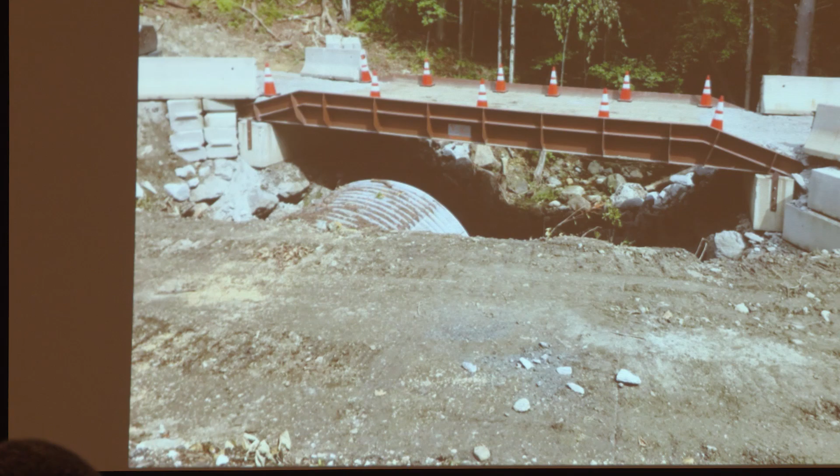Or you get lucky and you're replacing a culvert with a bridge and you don't really have to worry about the stream so much, and then you can throw in a temporary road. And I just want to put that in there to plug these temporary bridges. This is a Yard King. We actually borrowed this for a project. Really great, couple waste blocks. Really simple. Just wanted to throw that in because I know it comes up that you can't always close the road, and so that's a pretty good solution.

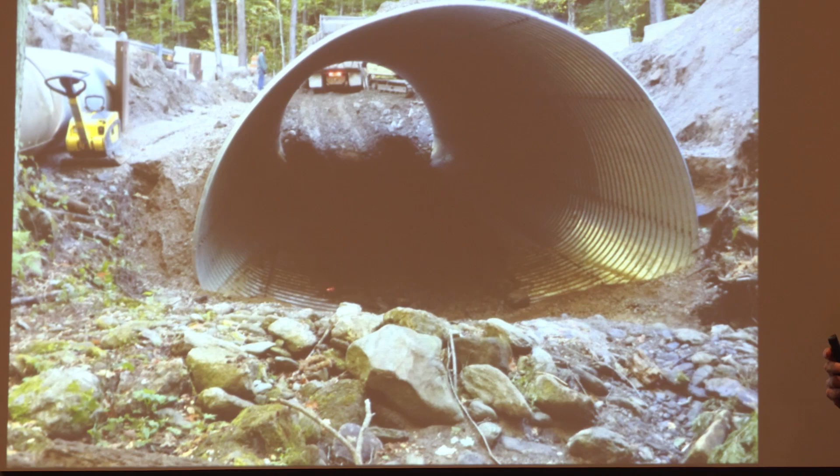So culverts, a lot of these structures are embedded, so they have a bottom. This is a multi-plate. I believe the width here is a little over 18 feet. Pretty big structure. So it's embedded. You can see on this one, there's the temporary stream bypass on the left. And so how do you get material in there? A lot of people talk about leaving some panels off the top and dropping them in with an excavator. I've never tried that. I know some have and it's worked. But you still got to manipulate that material in the structure.

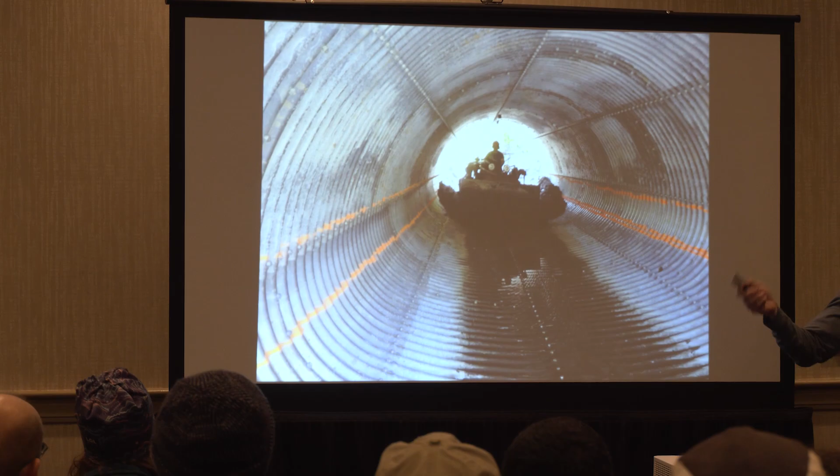And so what I like to do is paint lines. You have your stream bed elevation through your structure at your inlet and outlet. Run a string and then paint it. You see 2 lines. We're using stream simulation, so our structures are wider than the Vermont standard. And so we're accommodating that width with a bankfull bench, which is the second line.

This one was early. This is 2013. It's about a 13-foot wide structure. Contractor has got a mini excavator, and it worked really, really well. We could call in for bigger pieces, and he would bring them in. What we realized after the fact, and maybe it's obvious, but we didn't think about it, is everything settles, so you have to overfill a little bit. So if you want to match a certain elevation, you got to think about that. And so we've adjusted that. With our painted lines, we just adjust there, and so nobody has to really think about it.

And then you got to provide for ventilation. Maybe obvious, but it's not. I've been in culverts trying to manipulate stuff with rock bars, and you can't breathe. This is a very Vermont fix. It's a fan from a dairy barn. It worked really well. I think we had coats on in the culvert. It was really cold, but it was great. Worked really, really well.

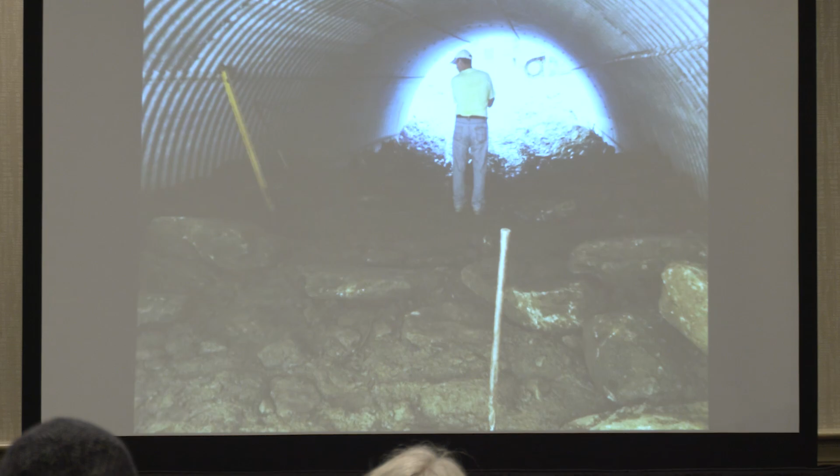And then there's a lot of physical labor in there. So when you're doing these projects, plan for that. I think the first one we did, I don't think the contractor realized that was what it was going to take. And so that taught us, at the pre-bid, really talk about what's expected. And so you'll see there's shovels and there's rock bars and there's physical labor. You're manipulating this.

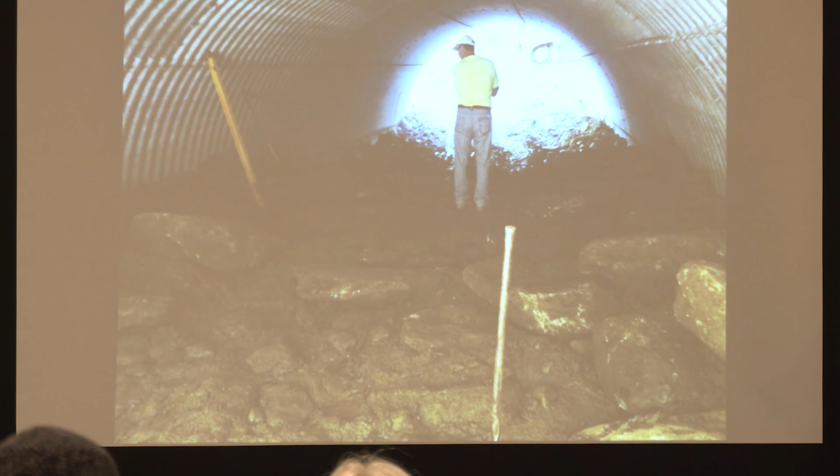And then sometimes you get to do a bottomless structure and you get the benefit of an excavator. I can't stress how important a thumb is when you're grabbing rocks. I know I've worked with a lot of contractors that didn't have thumbs on machines, and it's hard. So let's see if this works. I'll look at that technology.

So once you do that, then you got to tie it in, and that's where we had 200 feet of channel work upstream, and that was challenging. But it worked out. And then when you get the water through, a lot of people pull back and say, okay, water's there, we're done. But no, you got to make sure that it doesn't go subsurface. You got to wash those fines in.

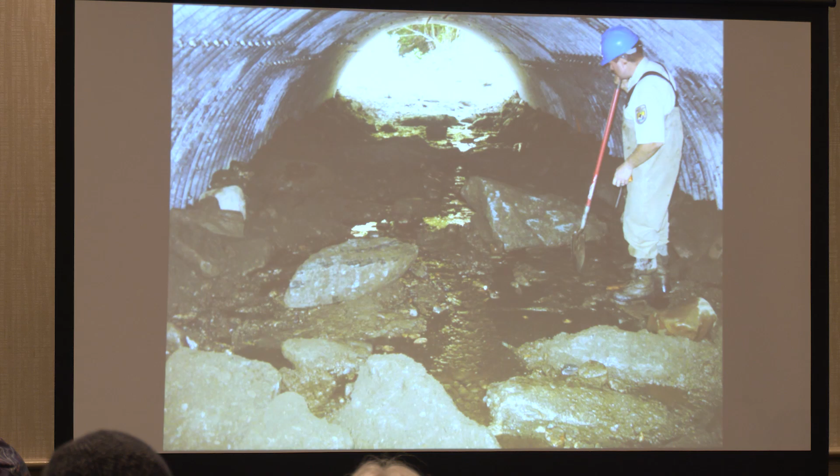This is the first structure we did in 2012. We learned a lot. And so we're chasing water with shovels. I know folks have used power washers and washed the fines in. There's a million different ways to do it, but you got to make sure it doesn't go subsurface. So when you're adding material into the structure, you got to make sure that there's a lot of fines in that mix. And we could dive really deep into material, but probably won't.

And then when it's all said and done, it looks like a stream. This is right after it was completed, that one that had over 200 feet of channel, and it fit seamlessly in with upstream and downstream. This structure went in 2017. Just in 2023, it went through five Q100 events in that subwatershed, and it doesn't look any different. And this was a perennial problem for the town. The site always had road issues, and they haven't had a single issue since it's gone in. So again, what's good for fish is really good for people.

So Ben, you want to talk a little bit about dams? Yeah. I'm Ben Canonica with Canonica Landworks, based out of Chelsea, Vermont. And Greg and I have done quite a few projects together, some dam removals, some riverbank restoration projects.

And I've also done a couple of culvert retrofit projects, which I haven't heard anyone talk about today, but essentially taking an existing culvert and making it so that the pool at the bottom is passable, and maybe putting baffles in as well. We've done a couple of those. I don't really see too many of those projects anymore. I don't know if they're still happening or not. Maybe they're just replacing them. It's a tool in the toolbox.

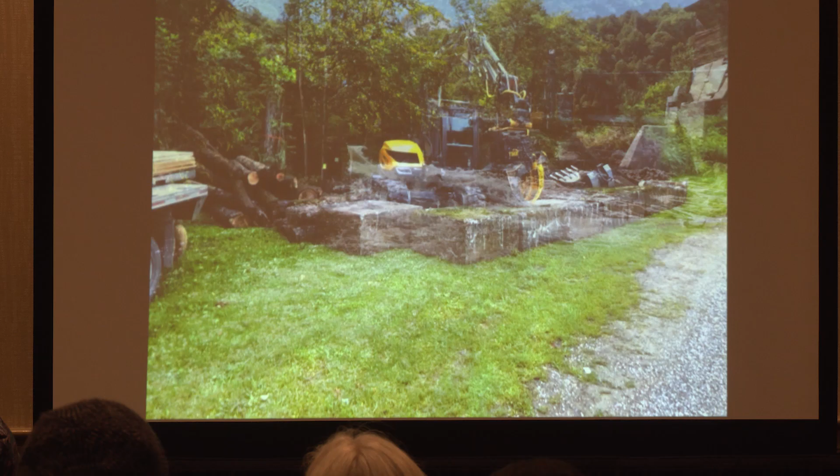And along with access is always, from my standpoint, just trying to keep things somewhat orderly and tidy. A lot of the sites, like has been touched on, are very compact. You don't have a lot of space to lay things out or stockpile. You can't see here, but this was part of a mobile home park, and we had a very small area to stockpile a bunch of material. And so these were old concrete blocks that were actually in the river, part of the abutment. And so we just pulled them out and made a containment area and then filled it up.

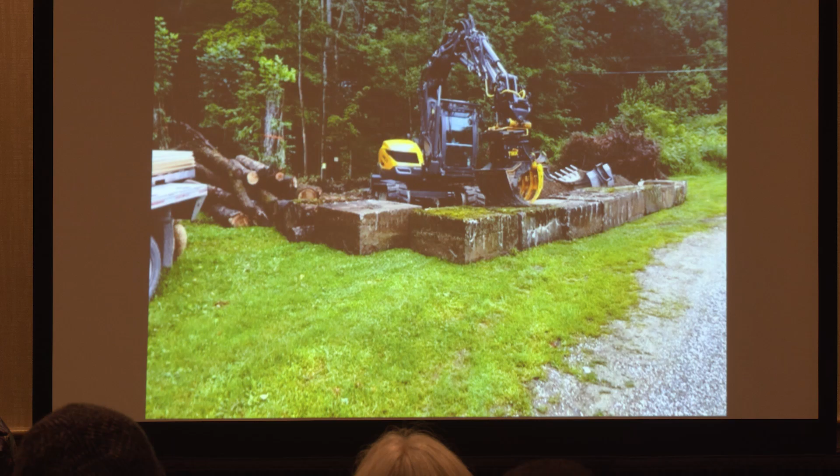And to be able to work in confined areas like that, it's pretty handy to have specialized equipment that you can work in areas that don't allow you a lot of room. But just keeping things orderly as well helps me. I work alone, so I try to make as many of the steps count as possible. And so for me, just having a sense of order helps me keep things going forward.

And I think it also helps with a public appearance, because if people come by and see, things are always going to look like a bomb went off at some point in the project. But if it's not like that for the whole time, I think you will get maybe a little bit less criticism and people stopping by asking questions.

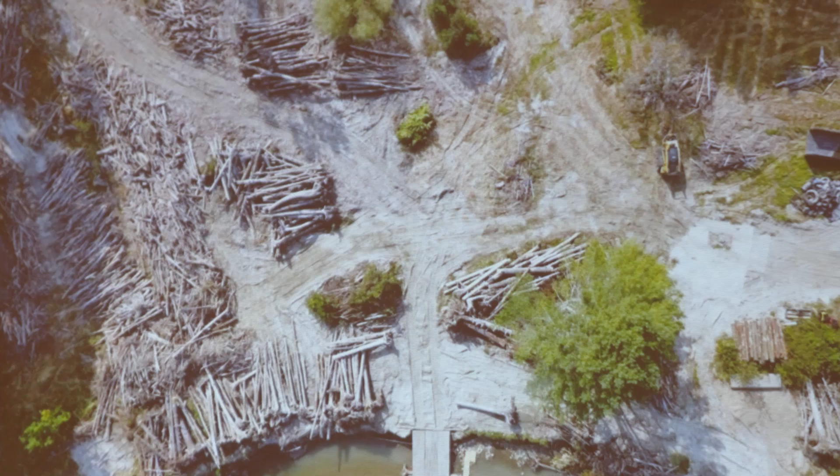This is a site we worked on this summer, and this just kind of gets back to getting things in somewhat of an organized fashion. We didn't have any before pictures, but basically this is a flood chute in here that was full of all that wood for like the last 20 or 30 years. So the project was to go through, sort all that wood, and then rebuild in this lower corner what we call a log revetment.

So being able to go through that and sort it all out, and then, we actually had a big grinder come in and grind up all the residual material, but just having to work through kind of an unimaginable log jam essentially, and think about keeping things somewhat orderly so that you can have things in certain areas, because once we got it all sorted out, all the root wads and stuff had to come over to this corner to be built. So just a certain process to think through.

And like Greg and I were talking about, you're always going to have a plan when you start, but on a lot of these projects, there's numerous unknowns that you'll encounter. And so being able to change your plan on the go is pretty essential. And for me, it's one of the challenges I like about it, because there's a lot going on you have to think about. But this got away from our dam removals a little bit, but just showing you overall site organization.

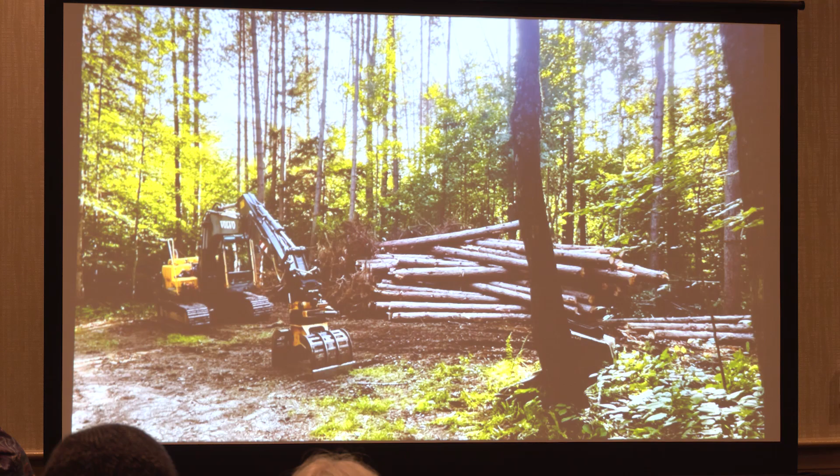And to me, the challenging part is usually getting the dam out of the way, but then the fun part is the creative aspect, like rebuilding things. And some of the sites have it and some of them don't. So that's always something to think about as you're going through the plans. Is it just removing the sediment, just removing the dam, or is there then rebuilding to do afterwards?

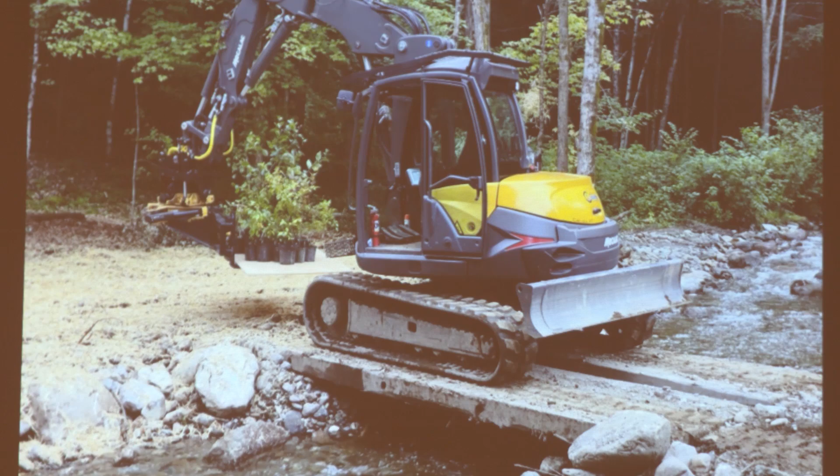And mats were talked about earlier, and I've become a big fan of mats. A lot of my projects, I just bring mats with me, and we're not required to use them on a lot of the projects. Some of them you are. I just feel like with the work that we're doing, essentially we're trying to limit any sediment transport in the water, trying to keep things somewhat clean. And by doing little things like this, just setting up a temporary access across it, it buys you a lot of good grace, I feel like. And essentially you're doing the right thing.

You could go back and forth through the water all day long with every machine, but honestly, it's a lot harder on the machines too, going down and across if things aren't always smooth. And it doesn't really take much extra time to set up the mats and use them from site to site. And more mats.

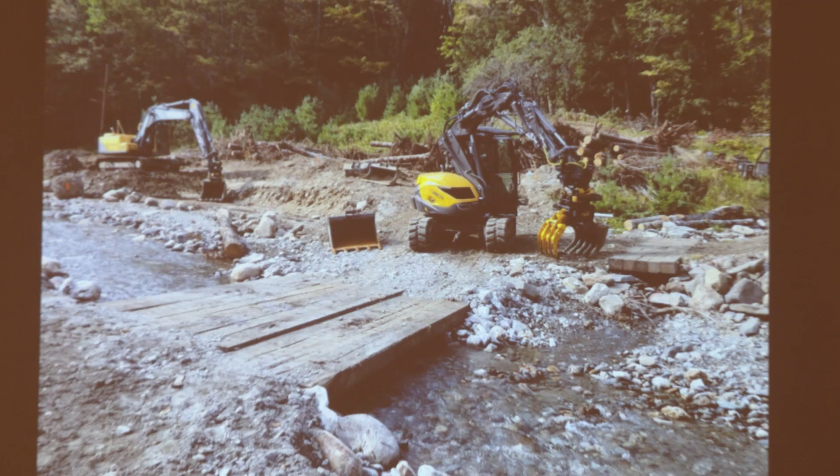This was another root wad site that I did a couple of years ago, and this is a good example of, earlier they were talking about from when they start the design aspects of projects, years can go by until it's actually implemented. And this project came to be after Tropical Storm Irene. There was a hotel that sat on the far side over here. And so this was 11 years, I think, in the works before we actually implemented it.

And I started this last summer, and right before we were set to begin, we had the flood last summer, and the whole site got changed quite a bit. And so we delayed the start a little bit, and we had to make some adjustments.

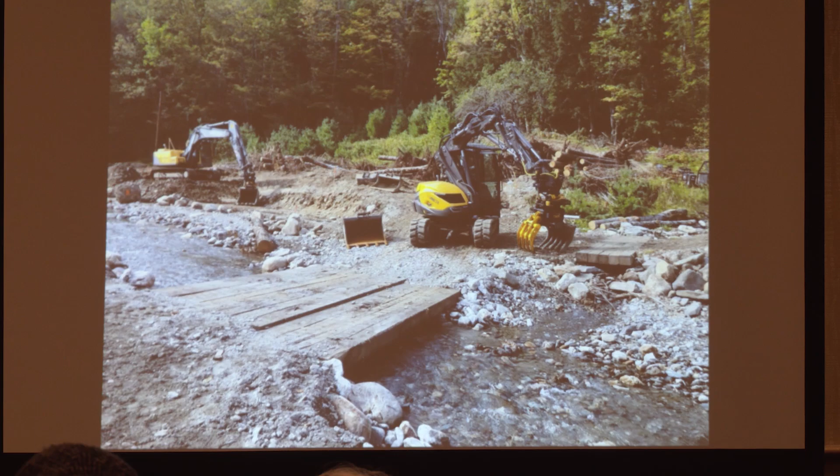And it just kind of goes to show you whatever's on the plan from when they started doing the initial assessment can change quite a bit when you actually get to implementation. So just to add, the picture that said dams, and that was working on the dam there, that was the Lower Eaton Dam. You talk about timelines. I think the initial conversation to remove that dam with the landowner started in 2002, and the dam came out in 2019. So you just think about the scale at the time.

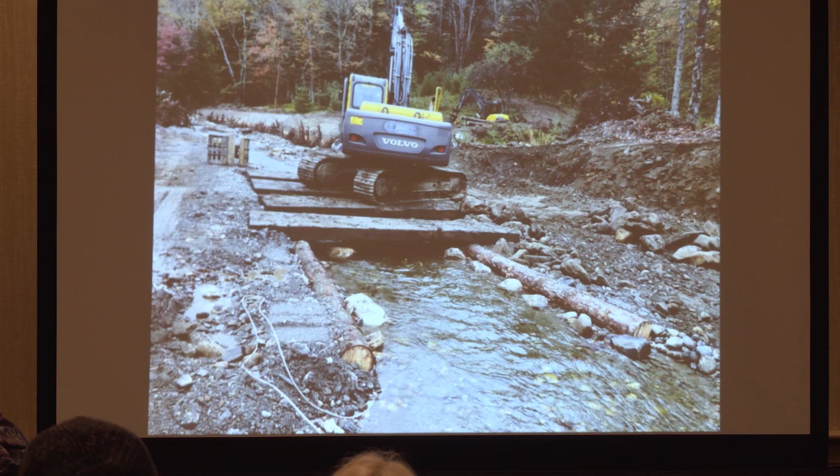And then the other thing I want to point out, there's a lot going on in this picture, but the first thing that I noticed was how clean the water is. And that's pretty impressive because there's a lot going on. So we noticed these things. And just other uses for the mats. And this is essentially, I couldn't reach all the way across and do the excavation I needed to. So just by putting the mats across as a work platform and keeping the channel going through there, it just kept things very clean.

We're not required to work in the dry all the time. So I try to do whatever I can to limit any sediment transport, just because I feel like in Vermont, they're very, I don't know, how would you? Well, I wasn't going to say sensitive. I was going to say common sense approach to working in the wet. If you go into New Hampshire, a lot of the projects you have to work completely in the dry, which requires a ton more work, just setting up cofferdams and everything. So, little things that you can do to try to keep the water clean while you're working, I feel like just goes a long way. What I like about this is how lo-fi it is, right? And it's very effective, but it's lo-fi.

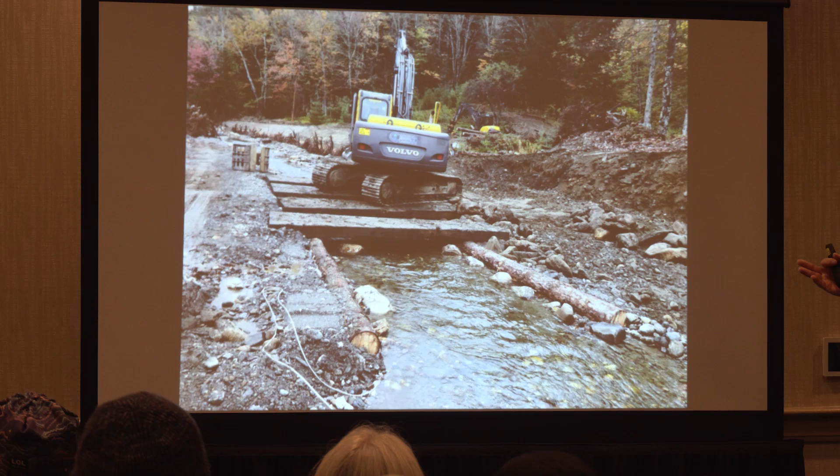I love it. And essentially there was a gravel bar that was created on this side from the flooding last summer. And before we got started on our project, I think VTrans had a contractor come in, and they had actually cleaned off this bar and excavated some material. So it was already kind of set up well for what we were going to do. Originally, before the flood of last summer, I was going to have to put a ford in downstream and get up onto this bank and go out across, just because the channel was very different then. So it was kind of a major impact to the plan I had, but it actually worked out much easier to be able to utilize what was there at the time of the project. More mats.

This was a project downstream from the last root wad project there, but essentially the engineer had come up with a plan to put trucks down across the steep bank, drive across the river, and then out through the floodplain. We had to excavate and truck off probably 2,000 yards of material. But the bank getting down from the state road was very steep, and so we went back and forth for a couple of years while this whole project was getting ready to happen as far as how we were going to approach it. And I visited the site numerous times just trying to wrap my head around how we were going to get trucks down there. And one of the neighbors stopped by one day and said that they had log trucks that had gone down this access and across the river back in the day when they logged.

And I said, well, how did you get back out of there? And he said, well, we had a skidder and we just pushed them back up the road, which is how things get done. But thinking about having to do that with a dump truck is not a feasible application. So we came up with an alternative and just brought everything across to the roadside, stockpiled it along the roadside, and then loaded it into trucks. It was an extra step on my part, but it kept the trucks out of the river, and it was also a lot easier access to make something like an off-road truck work than an on-road truck. We've used those off-road trucks on dam removals quite a bit. Like at Eaton, we had multiples going. So they're very effective working in tight spaces.

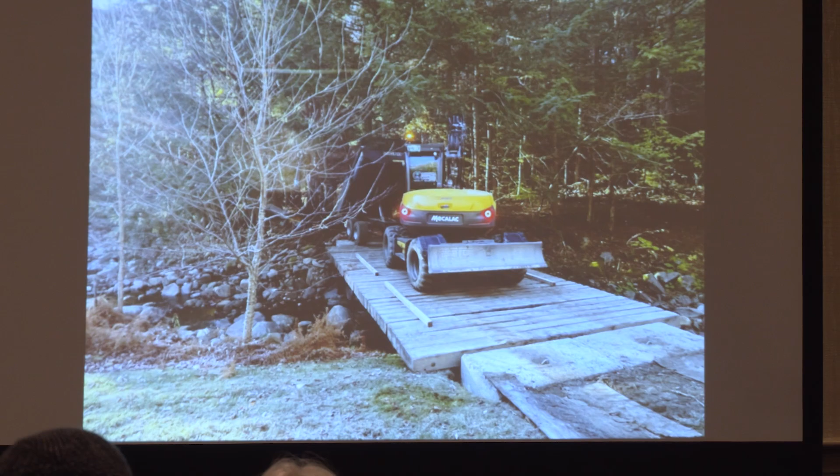And there's all sorts of temporary access options. This actually has steel under it. So this is one we set up on a private property where we were doing a stone bridge. But just getting in other places with a temporary steel and then putting mats across it. Lots of access options for that.

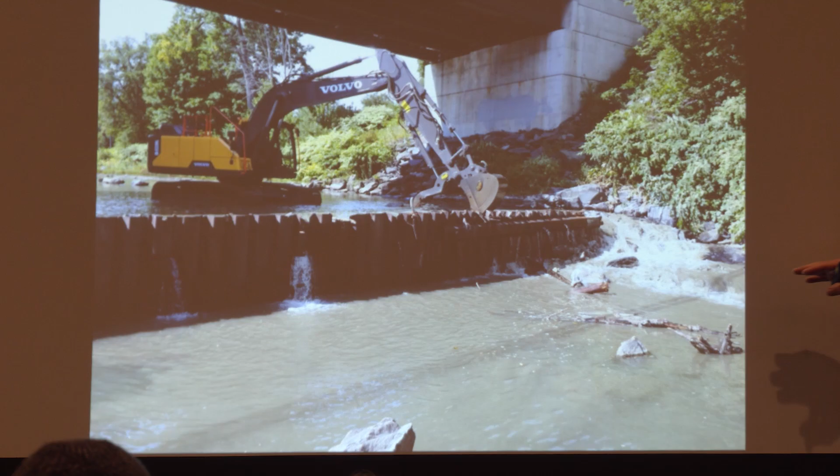And this was one of the first dam removals we did in Randolph. And we were just going through some of the pictures and thinking back to the steps that we had to take on this, and basically releasing this corner and drawing down the water and then taking out some sediment. And those are just some of the steps you have to think through as you're coming up with a plan to do the dam removals.

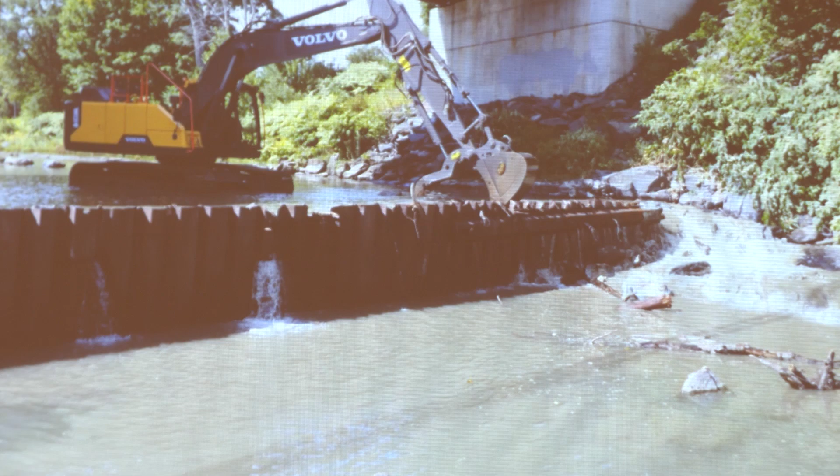You can't just punch a hole in it and let all the water, all the sediment out all at once. So you have to think through the steps of how you're going to get a hole started, to lower the water and then lower some sediment and then lower the dam some more. And every dam has different construction to it, and some of them are already breached, so that's not as much of an issue. But some of them have different gates on them, different elevations. So how are you going to use those holes that are already in the dam to help you with your water management?

And this one was just sheet piling down to ledge, I believe. Yeah, and the thing that I was going to add here is, and we've had this happen at a couple of dam removals, once you start removing the sediment and lowering the dam, everything kind of mobilizes upstream, and what you find can be a surprise. This one was a sewer main that no one knew was there. And on another dam removal, there were actually water pipes for someone's house that were now this high out of the ground. So things come up that you don't know about.

And I think we found another structure at this one. Yeah, a wood structure. Yeah, we found, and a car. So that kind of gets back to being flexible and having good communication with your engineer, with your project manager, and being able to talk through some of these things, because as much as you can have everything on paper and have a plan, I don't think we've worked on one that hasn't.

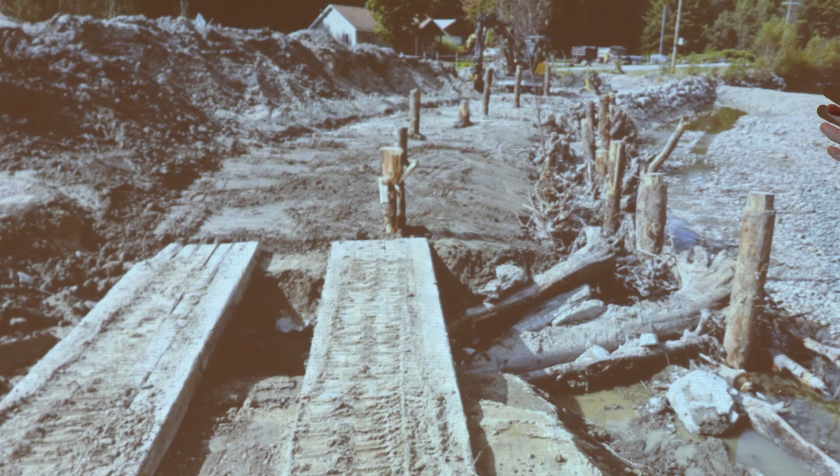And getting back to working in the dry versus the wet and coming up with alternative ideas for what was on the plan. This was the root wad project from the summer. The plans called for basically having a line of the big sandbags all the way from up here. We'd install that new riprap and then replace all this. So it was going to be a very long section of sandbags. And just thinking about having to install those, maintain them, and then do the work behind them with the channel right there.

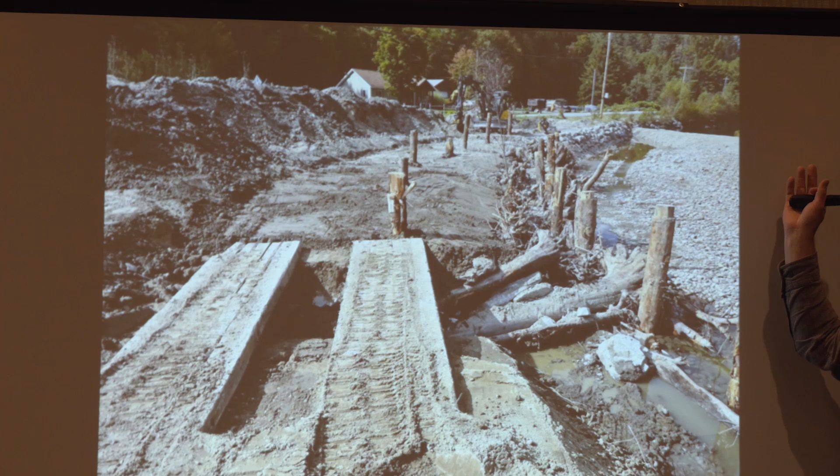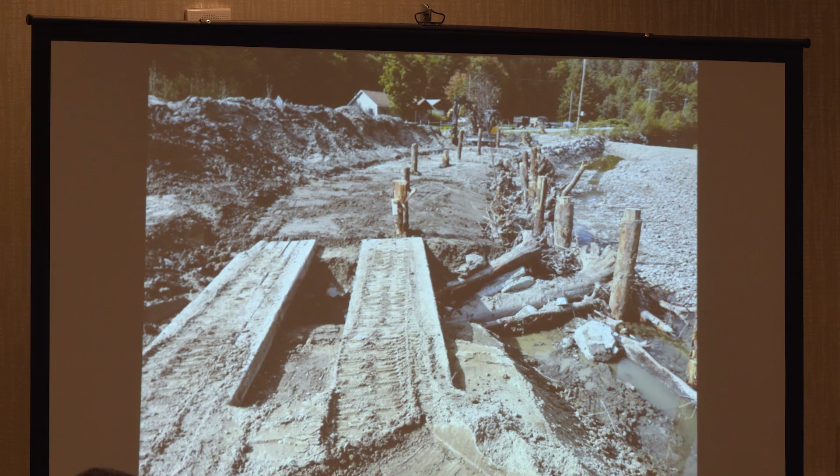We were able to get permission to use a flood chute that was right up there. This is a big gravel bar on the inside of the bend, and I was able to get permission to excavate out the flood chute that cut through the bar and use the excavated material to create essentially a cofferdam and divert the flow. So being able to look at the sites and options like that, again, it gets back to notifying the engineer and the project managers with enough advance warning so they could get it approved by the permitters, even though it wasn't the original plan.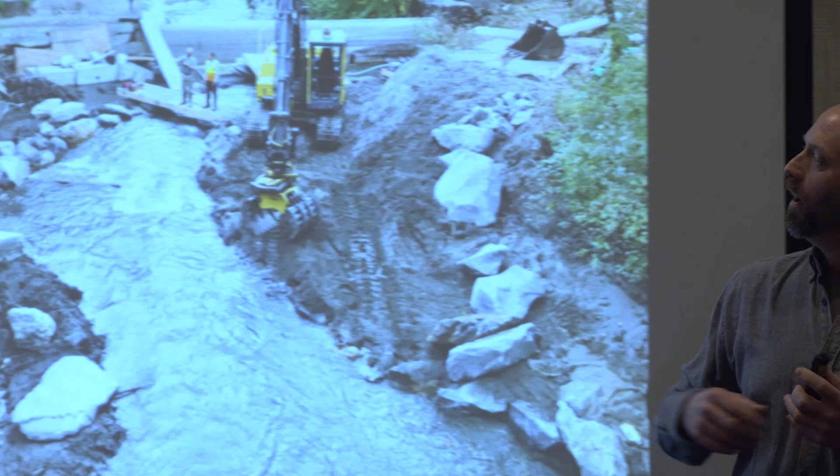And this is the site with the stable building from above. We're just getting started thinking about how we're going to fix our hole, which is behind the plywood there. I don't know if we've done our cut yet or not. We haven't. You can see how confined this is, and also the height, getting up and down the bank, having to set material down and keep our water running through the site.

Over on this side is where the old stone foundation with the gates was, so we were able to utilize some of those gates to keep lowering the water slowly. And we did have to set up a little mini cofferdam here because the guys who did the saw cutting had to get down in there and drill through the bottom, which was 8 feet from the top of the concrete down, right on top of the ledge.

They had to drill through so they could get their wire through and then cut up through with their wire saw. So this kind of had a combination of working in the wet and the dry. And this one, you've got a lot of cofferdams going on. You got areas that are isolated, so you don't have flow going right through them. And so the water is sort of turbid because, again, we're lowering the level here, and so we're pulling material from upstream. You're going to have some turbidity, but we're trying to keep that at a minimum.

And Ben did a great job of not having the machinery sitting in the water, and then isolating those areas where we needed to work. It was really thoughtful. This was a really, really hard site. Not much room, and the room that we had, we weren't allowed to go on. So.

And just thinking about planning for water when you're on these sites, and at the different phases, we definitely had some high water come through while we had the site opened up. But also just think about where you are in the watershed, what size water you're working on. I've got probably one project over in New Hampshire a couple summers ago, which was the Ammonoosuc River, and it was the drainage coming off of Mount Washington.

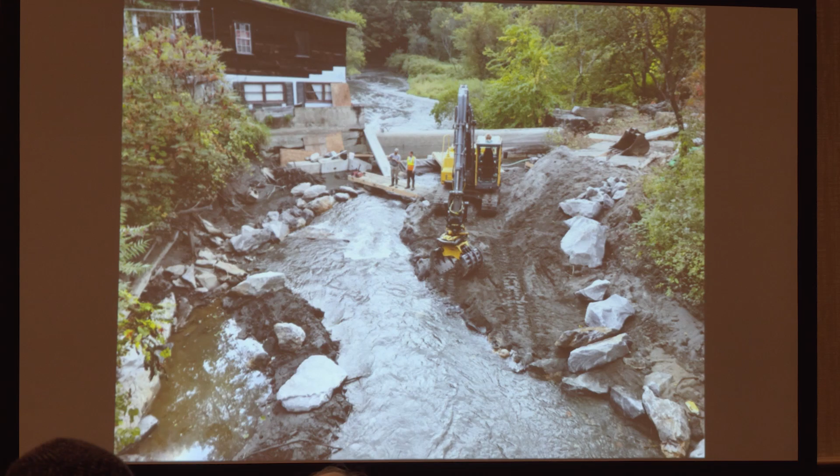Yeah, I was going to say a lot of the streams in our watershed are real flashy, and it goes true with culvert replacement. So you're doing a culvert replacement, how flashy is that stream? And with the way things have been, we get rain, yeah, I think.

Okay. You got a couple more? Deep in thought here.

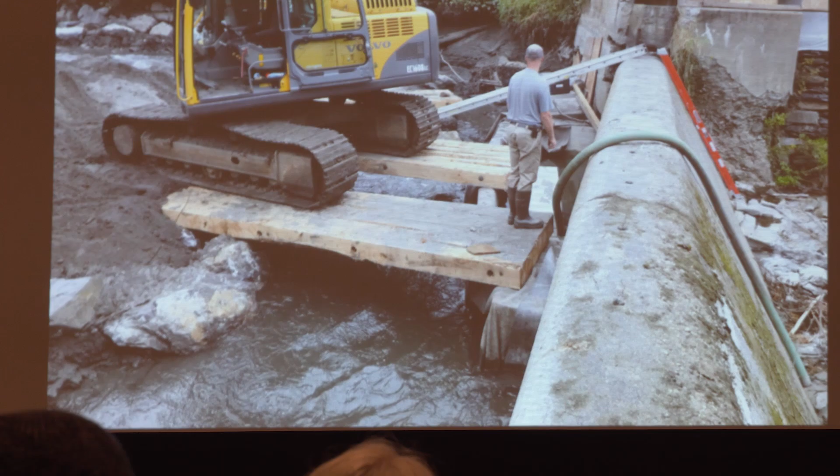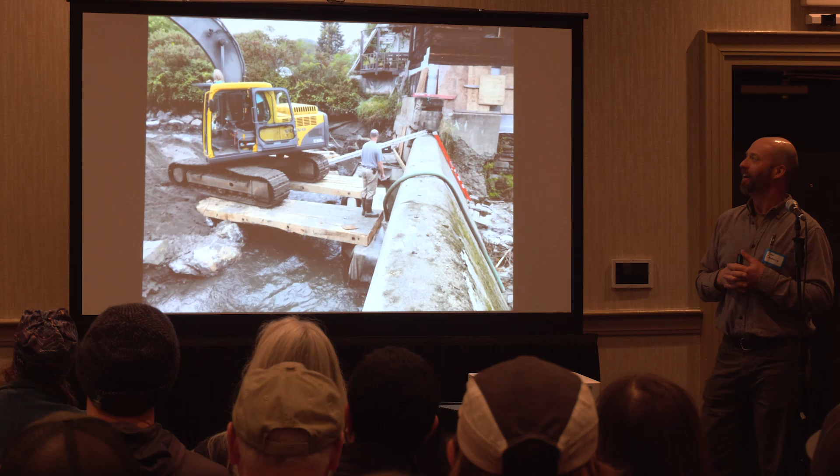And so you can see what we were up against as far as the concrete that was holding that building up. The wood structure started up here, and if you went in under there, all these timbers that were supporting it were marginal at best. And so it just added another layer of awareness as we were working and trying to be very gentle, and we had attempted to get her to be out of the building while we were working, but she was not open to that. So, yeah, it just adds different layers of stresses to working conditions.

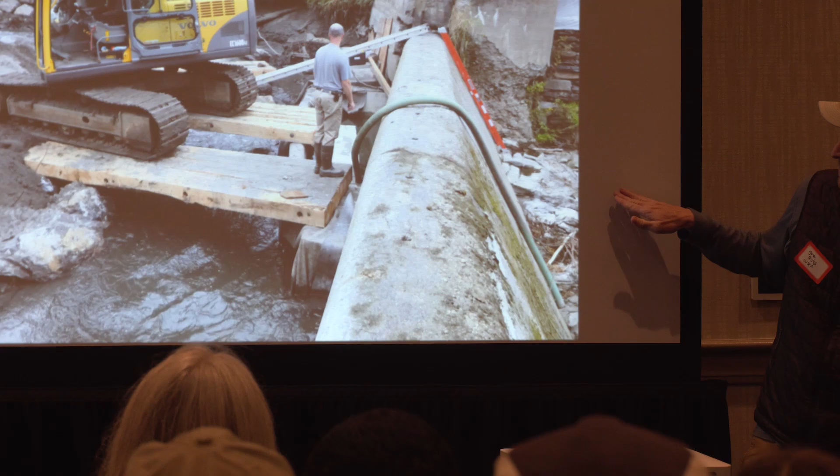Thing I'll add to this is, again, the mats and the cofferdam here that he lined so we can pour through. What was really nice is at this site, water came around and you don't see it, but he put blast mats down below. And hopefully I'm not giving away too many secrets here. And so when he's hammering on the dam, he actually hammered from the mats. So the river is going underneath his excavator while he's hammering.

And then the blast mat down here caught the concrete, and so it didn't go very far, and it didn't go downstream into the channel. So he was able to keep the site that looked like a bomb went off really clean. It was really nice. Huge fan of the mats. And clean is a relative term.

Yeah. And I will throw this out. This is not the norm, and there was a lot of legal work that went in to protect all of us in case something happened. So this is not the norm.